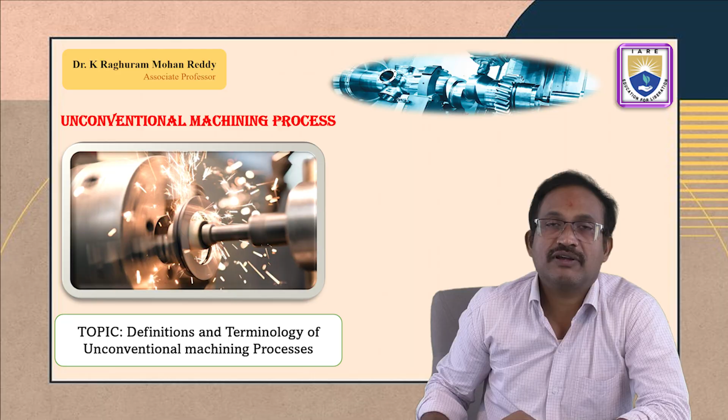Let us discuss definitions and terminology of unconventional machining process. In this topic, we need to discuss short answer questions so that these definitions will be useful to the students for fast and quick review. At the end of this session, the student will be able to define unconventional machining process and various terminologies associated with it.

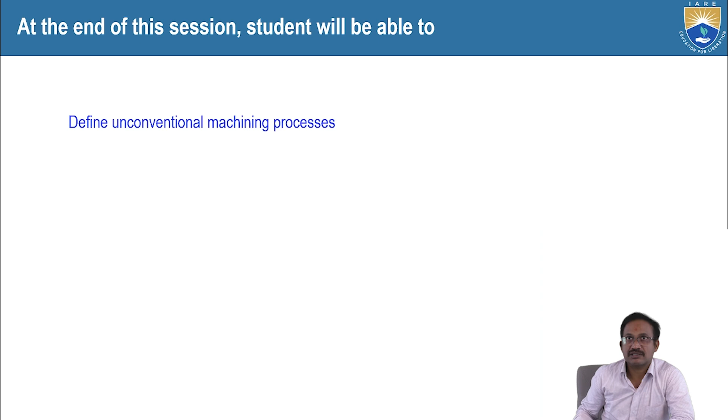Now, what is the need for unconventional machining process? High production rate, low cost production, better surface integrity, high surface finish. Definitely high surface finish we expect, and better surface integrity, no issue. But low cost production, here I think you may have doubt, because of this expensive equipment, how can we expect low cost production?

Because of the complexity of the geometry, the profiles cannot be cut by using conventional methods, so this technique can be deployed, and subsequently we can expect production with low cost. If the complexity increases, it is very difficult to manage with conventional methods, and it will take much time and other precautions and setups, so that the cost will be increasing. But with this sophisticated technique, we can machine even complex and brittle materials so that it can be low cost of production.

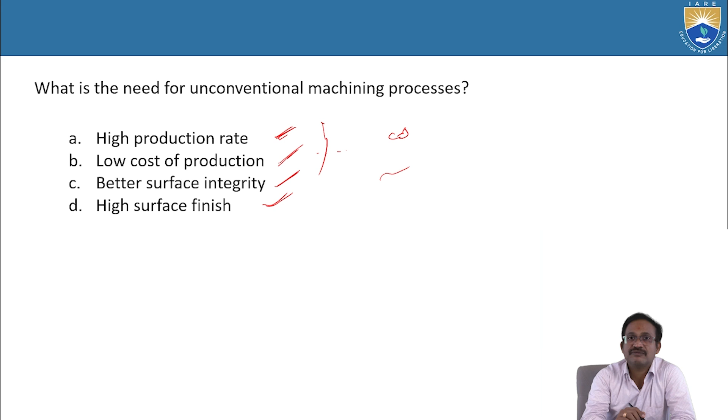surface finish, in terms of microns, this would be better. So usually we use these techniques for sophisticated, high precision and high surface finish requirements.

What are the characteristics of UCM process? What is UCM? Unconventional machining processes, UCM - not USM, UCM, sorry. Next, these are the different characteristics of unconventional machining process.

Performance is independent of strength barrier. Uses different kinds of energy in direct form. In general, low material removal but better quality products. Comparatively high initial investment cost - this is one of the disadvantages too. Initial investment cost is high, but if we deploy for mass production and special jobs, this would be better in terms of economy.

Tool material need not be harder than the workpiece material. Usually in order to machine, the workpiece material should be less strong compared to the tool material, but it is not true in this case. Here the tool material can be soft compared to the hard workpiece material. Machined surface does not have any residual stresses - that is one of the greatest characteristics of unconventional machining process. Why? Because here localized stresses or localized material removal will be taking place.

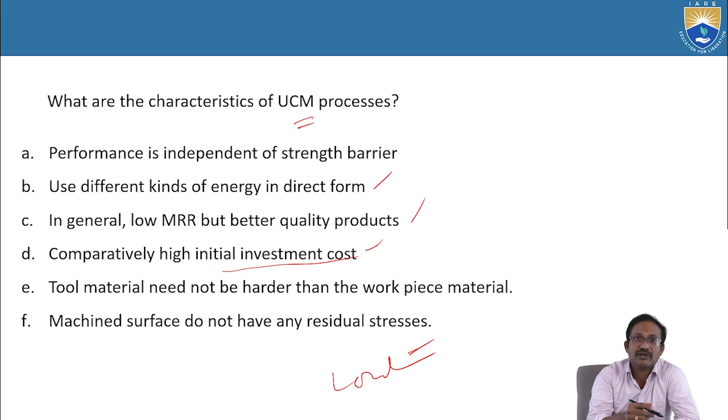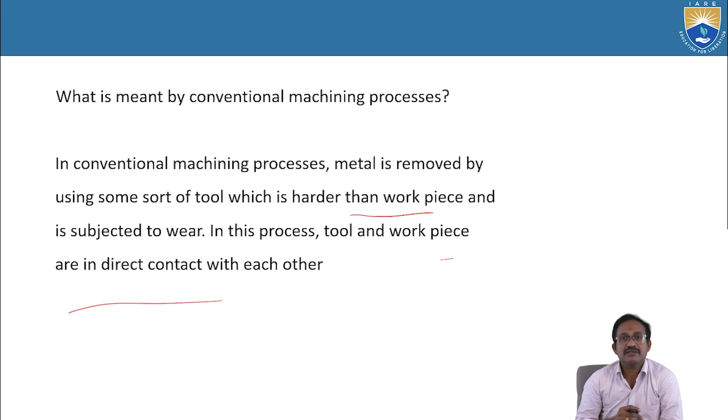Next, what is meant by conventional machining process? In conventional machining process, metal is removed by using some sort of tool which is harder than the workpiece and is subjected to wear. In this process, tool and workpiece are in direct contact with each other.

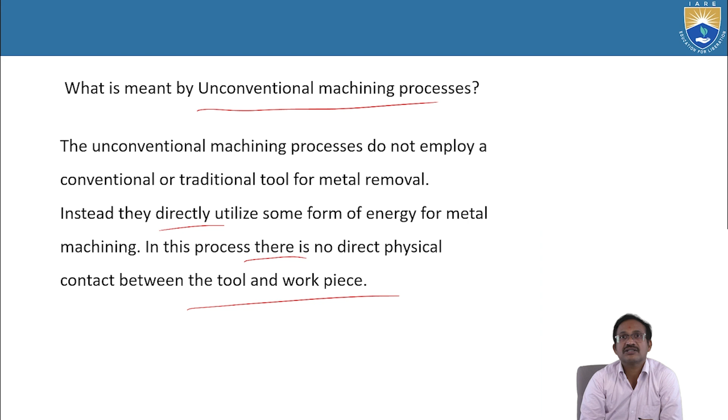What is meant by unconventional machining process? The unconventional machining process does not employ a conventional traditional tool for metal removal; instead they directly utilize some form of energy for metal machining. In this process there is no direct physical contact between the tool and workpiece. So in unconventional machining, there is no direct contact between tool and workpiece, but in conventional machining process, direct contact will be there between tool and workpiece.

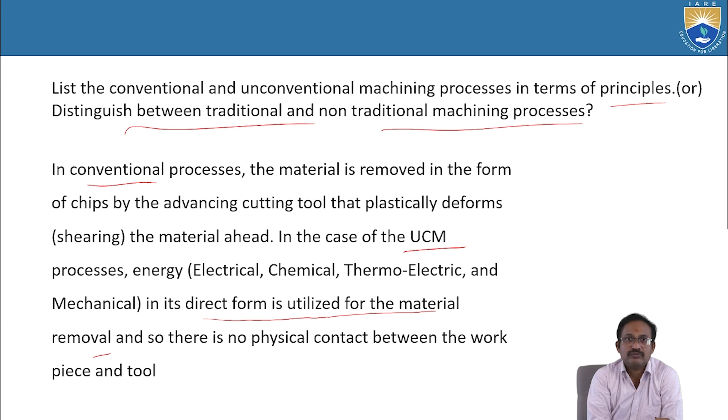List the conventional and unconventional machining process in terms of principles, or distinguish between traditional and non-traditional machining process. In conventional machining process, the material is removed in the form of chips by the advancing cutting tool that plastically deforms the material ahead. In the case of unconventional machining process, energy that may be electrical, chemical, thermoelectric or mechanical in its direct form is utilized for material removal, so there is no physical contact between the workpiece and tool.

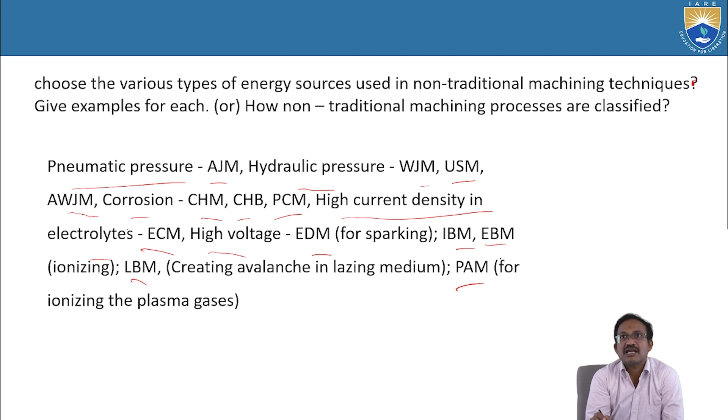Choose the various types of energy sources used in non-traditional machining techniques - give examples for each, or how are non-traditional machining processes classified? Pneumatic pressure for abrasive jet machining, hydraulic pressure for water jet machining, ultrasonic machining, abrasive water jet machining, corrosion for chemical machining, chemical bonding for photochemical milling, high current density in electrolytes for ECM, high voltage for EDM, ion beam machining, electron beam machining for ionizing, laser beam machining by creating avalanche in lasing medium, and plasma arc machining for ionizing plasma gases.

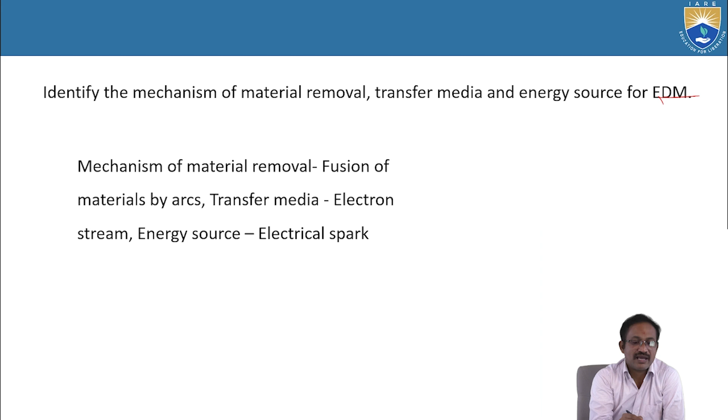Identify the mechanisms of material removal, transfer media and energy source of EDM - electro discharge machining. Mechanisms of material removal: fusion of material by arcs. Transfer media: electron system. Energy source: electrical spark.

What is the mechanism of material removal, transfer media, and energy source for ECM and ECG (electrochemical machining and electrochemical grinding)? The mechanism of material removal is ion displacement, transfer media is electrolyte, and the energy source is high current.

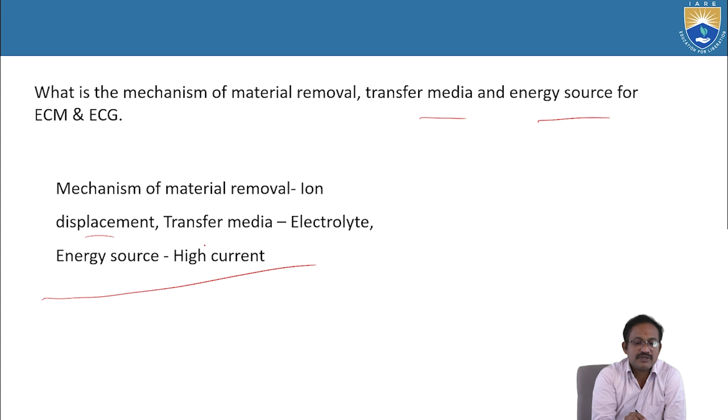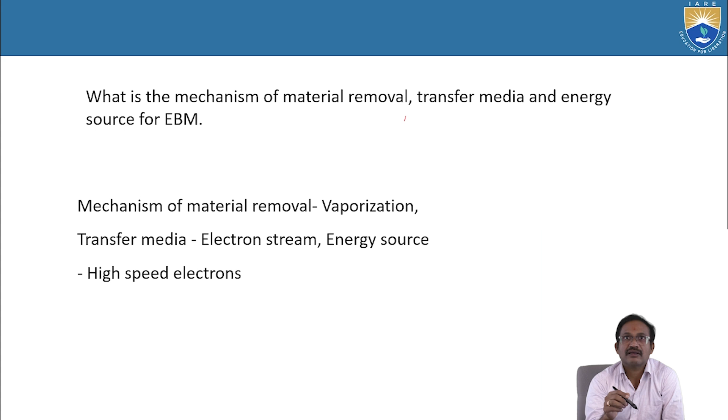What is the mechanism of material removal, transfer media, and energy source of EBM, electron beam machining? Mechanism of material removal is vaporization, transfer media is electron stream, and energy source is high speed electrons.

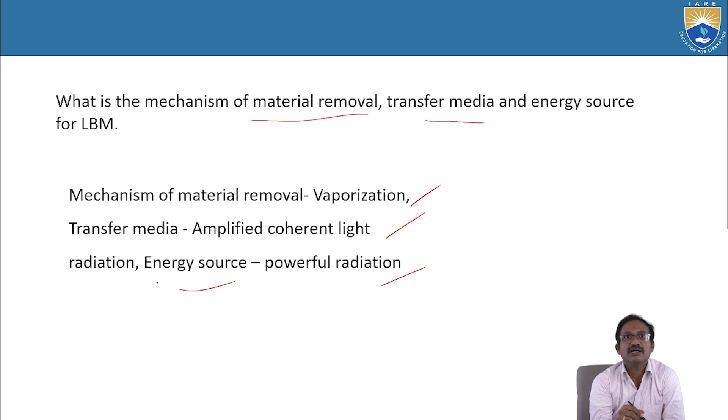What is the mechanism of material removal, transfer media, and energy source? Material removal is vaporization, transfer media is amplified coherent light radiation, and energy source is powerful radiation.

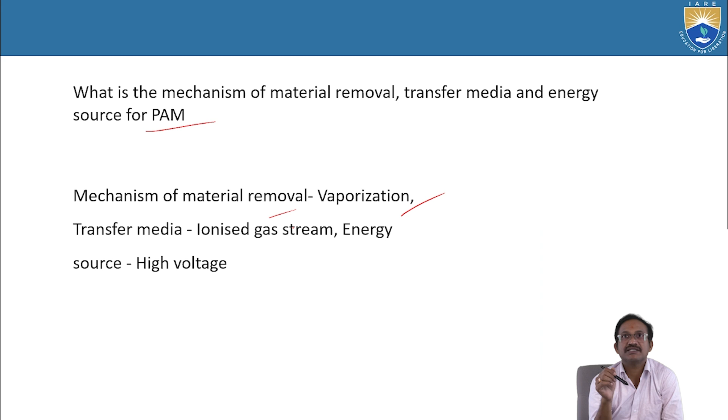What is the mechanism of material removal, transfer media, and energy source of plasma arc machining? Material removal is vaporization, transfer media is ionized gas stream, and energy source is high voltage.

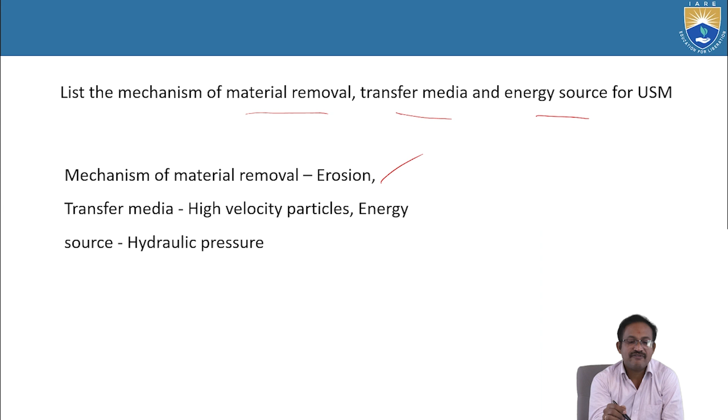List the mechanism of material removal, transfer media, and energy source for ultrasonic machining. Mechanism of material removal is erosion, transfer media is high velocity particles, and energy source is hydraulic pressure.

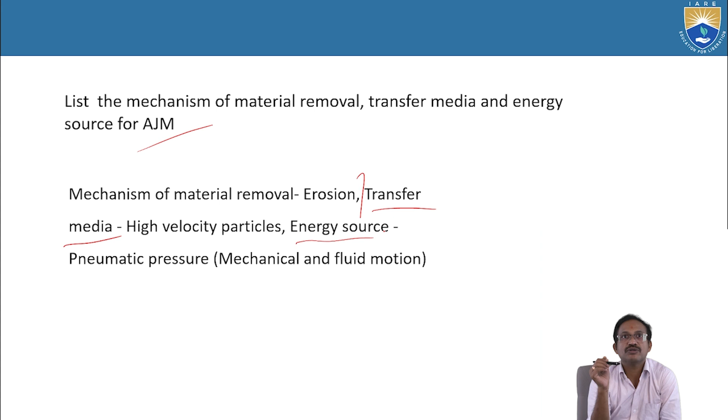List the mechanism of material removal, transfer media, and energy source of abrasive jet machining. Mechanism of material removal is erosion, transfer media is high velocity particles, and energy source is pneumatic pressure, mechanical and fluid motion.

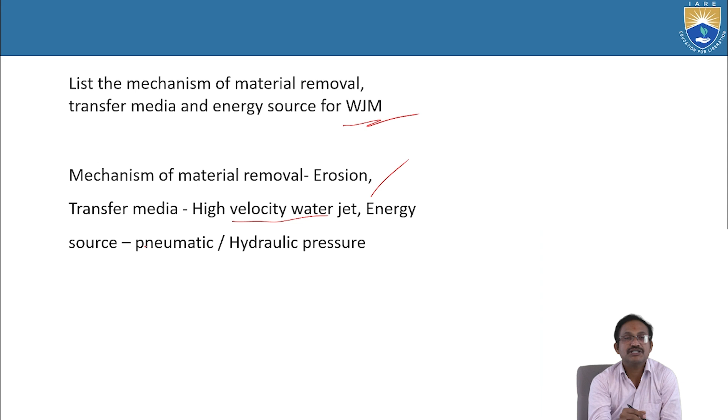List the mechanism of material removal, transfer media, and energy source for water jet machining. Material removal is erosion, transfer media is high velocity water jet, and energy source is pneumatic and hydraulic pressure.

List the energy source applied in the following processes: ion beam machining, chemical milling, electrochemical grinding, electrochemical machining, electro discharge machining, electron beam machining, abrasive jet machining, and laser beam machining. Here we need to explain the energy source for each.

For ion beam machining, the energy source is ionized substance. For chemical milling, it is corrosive agent. For electrochemical grinding, it is electrical current and mechanical motion. For ECM, electrochemical machining, it is electrical current.

For EDM, electro discharge machining, the energy source is electrical spark. For EBM, electron beam machining, it is high speed electrons. For AJM, abrasive jet machining, it is mechanical and fluid motion. For LBM, laser beam machining, it is powerful radiation.

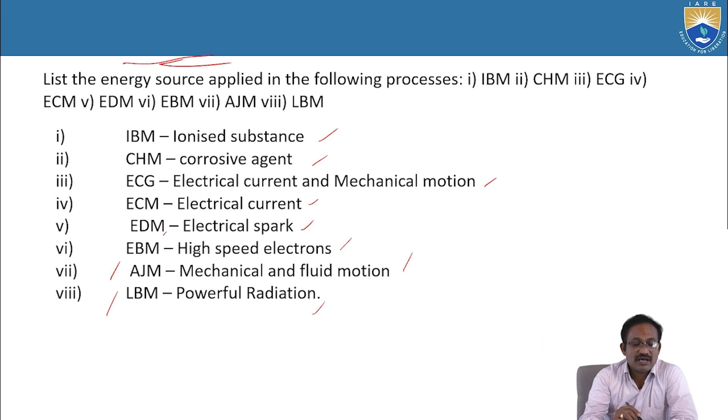So these are the energy sources for different unconventional machining processes.

What is the necessity for unconventional machining processes, or what are the importance of unconventional machining, or enlist the requirements that demand the use of advanced machining processes? So far we have discussed that with conventional techniques we can machine if the material is soft, ductile, or malleable enough. But if the material is hard and brittle, it is very difficult to cut or machine with traditional machining processes, and at the same time the geometry may be complex.

Definitely, in conventional methods it will take much time and require many other setups too, and at the same time we cannot expect high precision. Unconventional machining processes overcome these difficulties. So, what is the necessity for unconventional machining process, or what is its importance? If the material is strong or hard, we have to go with unconventional machining process.

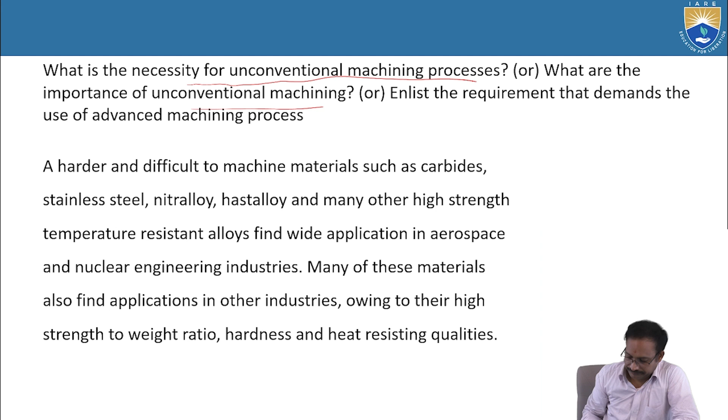Define unconventional machining according to the major energy source employed. Unconventional machining is classified according to major energy source as follows: A. Thermal energy methods.

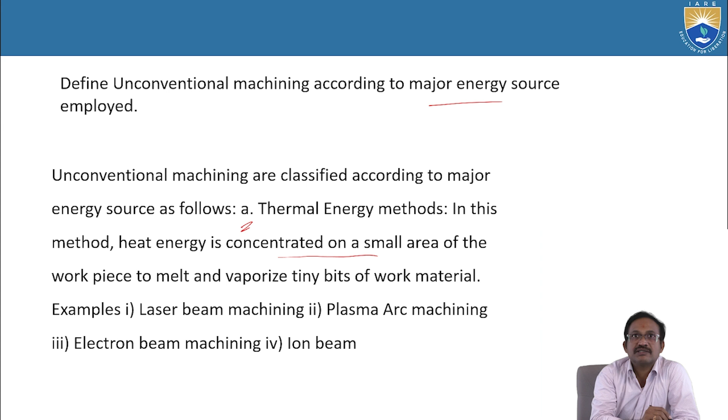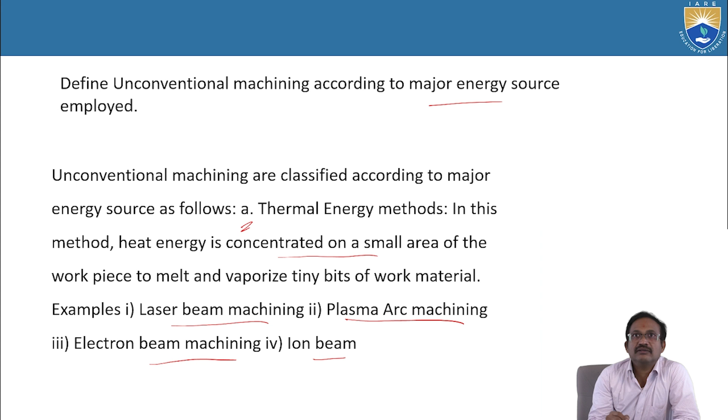Name the unconventional machining processes which: 1. Are used to remove maximum material. 2. Are used to remove minimum material. 3. Consume maximum power. 4. Consume minimum power. For different requirements, we have different techniques.

To remove maximum material, we go with electrochemical machining and plasma arc machining. To remove minimum material, electron beam machining. To consume maximum power, laser beam machining requires maximum power. To consume minimum power, plasma arc machining, where the power requirement is low.

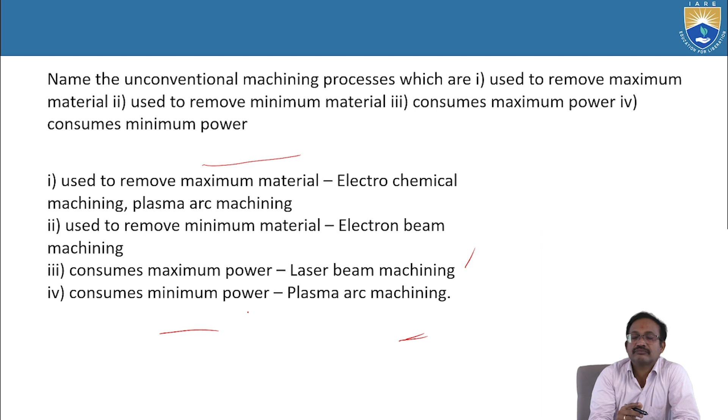Name the unconventional machining process for machining the following materials: non-metals like ceramics, plastics and glass; refractories; titanium; superalloys; and steel. For non-metals like ceramics, plastics, and glass, ultrasonic machining, abrasive jet machining, electron beam machining, and laser beam machining are best suited.

For refractories, ultrasonic machining, abrasive jet machining, electron beam machining, and electro discharge machining are used. For titanium, electro discharge machining is good, since titanium has a high strength to weight ratio and is hard.

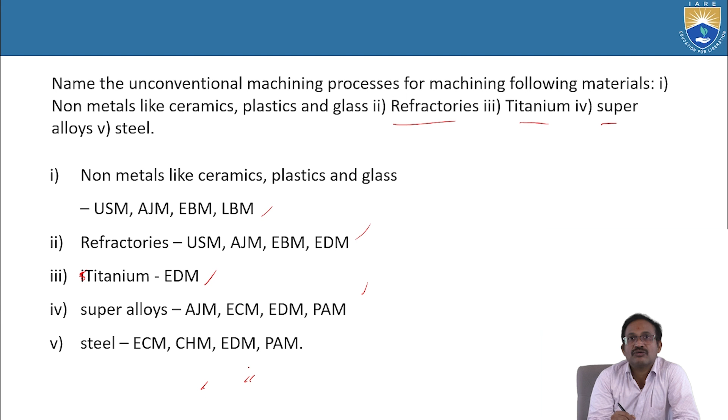For superalloys: abrasive jet machining, electrochemical machining, electro discharge machining, and plasma arc machining. For steel: electrochemical machining, chemical milling, electro discharge machining, and plasma arc machining are best suited.

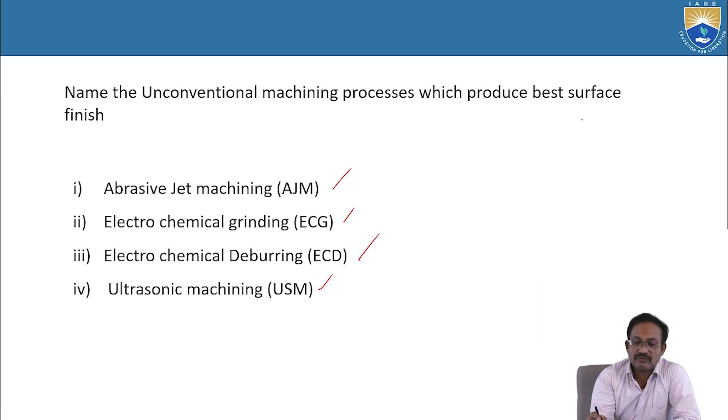Name the unconventional machining process which produces the best surface finish. Abrasive jet machining is the first one, followed by electrochemical grinding, electrochemical deburring, and ultrasonic machining. So for best surface finish, these four are very popular.